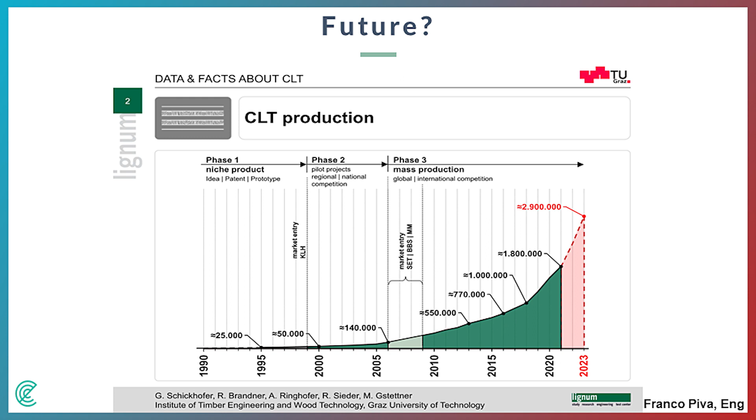Look what happened in 2010, 2015, and this year they expect that the maximum capacity, what we can call the press capacity of all the factories all over the world, will be almost 3 million cubic meters, which is huge. 20 years ago, it was approximately 70,000, 80,000 maybe. And now we're talking about 3 million. I asked the Graz University of Technology, who created this slide, if they have something to update, to see how they think 2024, 2025 will be.

Personally, I expect that for sure it will be more than 3 million. There is a lot of room still in the market. The demand is really high all over the world, not only in Europe, not only in North America. So I think this diagram will keep going up, and in the next few years it will be more than 3.5 million cubic meters. It is in metric, sorry, but imperial is very hard for me. 3 million in cubic feet, I have no idea. You can check, but it is really a lot of material.

CLT, in my idea, mass timber in general, is not just a material. It is not just timber. It is not just something we can use for our building. I really think that timber is a digital material. It is something we can quite easily use in our 3D model, in our digital model, and all these things together brought a big revolution in the market. So in the past 10, 15 years, we're getting more and more acronyms like BIM, DFMA, or aspects like robotic prefabrication, computational design, off-site versus on-site.

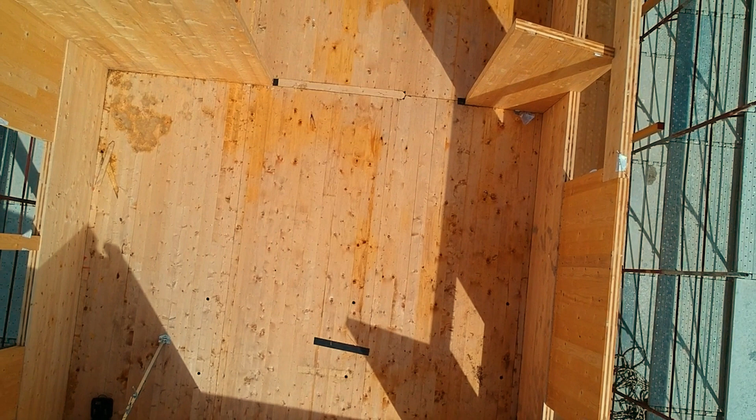And to show you what I mean for holistic and for detailing for DFMA, I made this short movie with my drone a few years ago. I was on the site, and I wanted to show that we need to raise our point of view. We cannot just look at our feet and say, okay, let's talk about the structure, let's talk about acoustic, that's it. No, we need to raise the point of view.

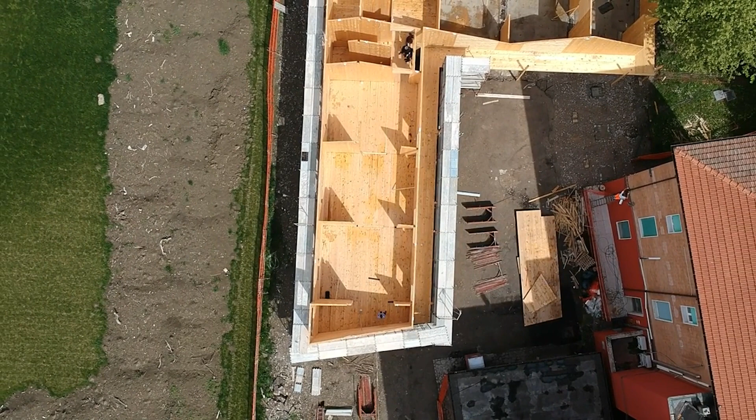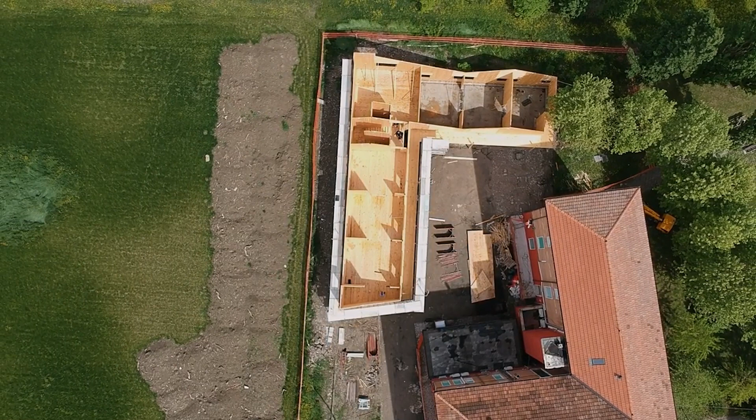We need to see how the site is. We need to know how big the crane is. We need to know if there are some limits for the trucks. When we work, for instance, on projects in Australia, we know that we always have to deal with the size of the container. They are 40 feet. They cannot be longer than that. Even if it is 40 feet plus 1 inch, the beam will be too big and cannot be transported on a container. So once you have the global view, the big picture of the project, then you can design the building and you can value engineer it using the tools we have like the DFMA.

And this is a very nice picture I took from this artist. This is what happens in many, many cases. We design something, we dream this building, then there is the first step, we meet the client, then we prepare the final drawings. Here we could be at level LOD 200, maybe LOD 300, but then on site you got this.

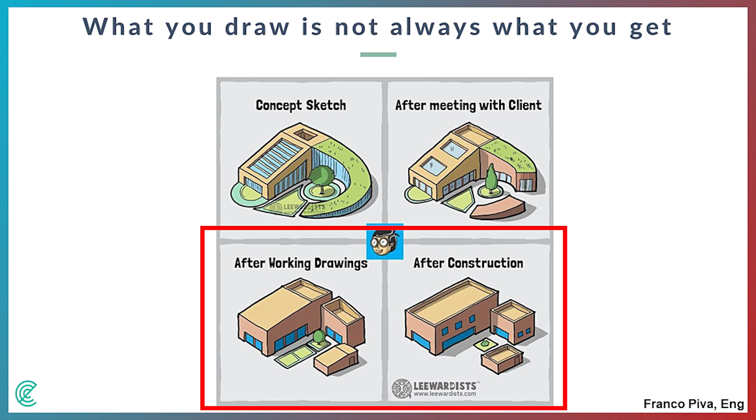I'm not saying that timber is solving all the problems, not at all. I was saying before, this year was so stressful for us with a couple of complicated projects that I told my colleagues, my business partner in Italy, I'm giving up. Stop, because there are so many problems. But this is very frustrating when we see it, because it means that there are so many problems between 1 and 4. So timber can help us.

How can timber help us? Because timber can be seen as a digital material. So once we prepare the drawings, we are sure that we draw something and we get exactly that element on site. No surprise, at least for the structure, everything will be exactly as it was on the screen. So those of you who were using the computer in the 90s know the acronym: what you see is what you get.

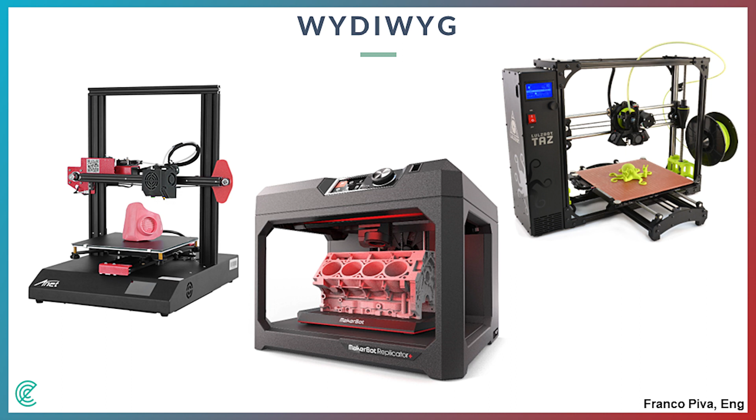It was meant to say, you see something on your screen, you print it, and you get it on your laser printer exactly as it is on your screen. Now we can make the same thing in 3D. You draw something, you get it on site. I'm sure you're very familiar with 3D printers. You can use Rhino, you can use the software you like.

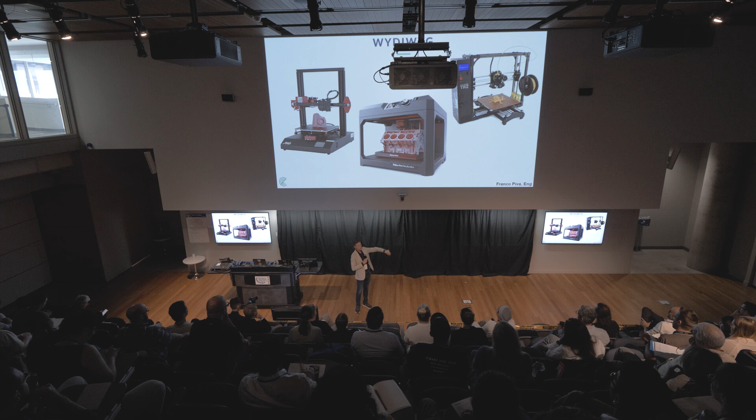It is something similar, in my opinion, to what happened in the Matrix movie. The people were seeing this, but behind this, there was a real world. There was a total real, semi-real world.

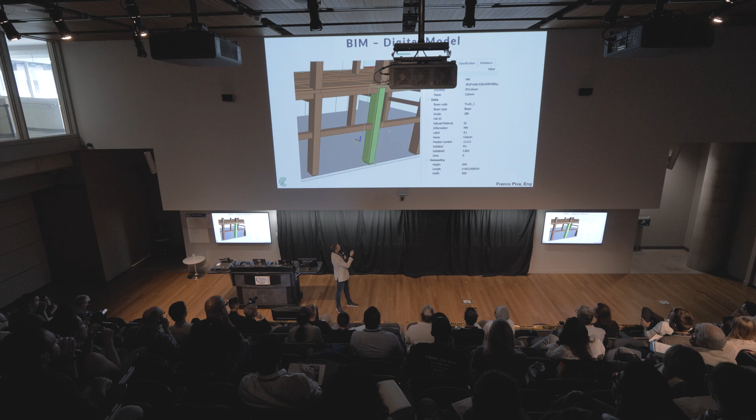And when I speak about the digital model, the IFC, the DFMA, etc., this is what I mean. The drawings prepared by the manufacturers, by us, or by the timber engineers in general, is an IFC model. And when you click on an element, the information you receive is not just "this is a timber element," stop. No, here you can read a lot more information. You can see that this beam will arrive on the first truck. The grade, GL28h, is the European grade.

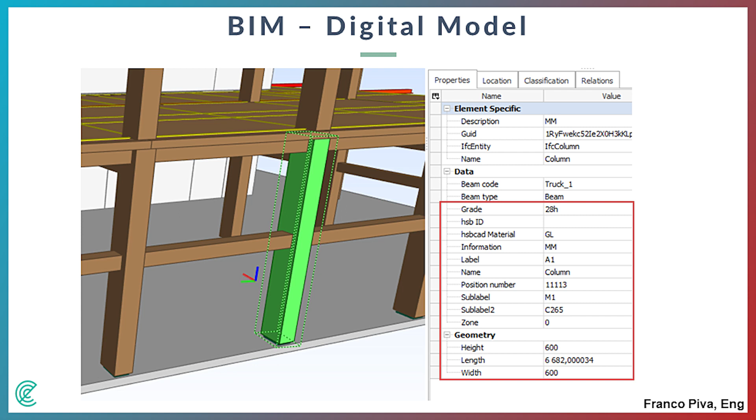Glulam, the name of the producer, and the number; there will be a label somewhere on the column telling you that this is label 11113. In our case, it means block 1, level 1, element number 113. So you click on the element and you see all the information. And that column, which is very complex, here is the head of it. The head of the column has this shape because we need to create enough room for all the connections. There is a mix of custom, bespoke and standard connections.

But the good thing is that on site, this is what we receive. These columns are quite big, 60 by 60 centimeters. We're talking about an 8-story building in Denmark. It is an office building, and you see the shape of the head of the columns compared to the drawing. Exactly the same size, no matter how complex the detail is.

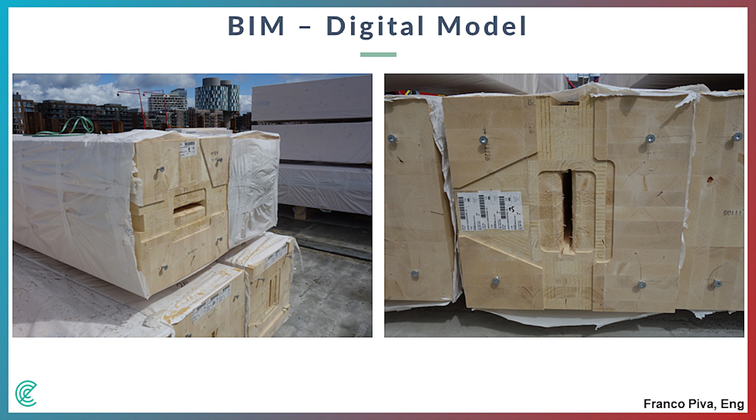The most complicated part is detailing, because behind this there is someone in the office spending hours and hours preparing the drawings, to be sure that the CNC machine will create that element as it was in the drawings. So sadly, in many cases, the time needed for the detailing is not considered, is not taken into account during the design process.

I look at the Gantt diagram. They arrive here, LOD 200, 300. Two months for production drawings. No way. Not doable. Oh, my image disappeared. Not doable. You cannot do it in such a short time. You need much more time for the detailing, for the connection design, optimization. Otherwise, it will not be a good result. So the production drawings are something similar to this.

You need to draw every single element. It's not enough to say slotted steel plate with 20 dowels. No, you have to draw every single dowel, one by one. You have to draw the steel plate. You have to consider the tolerance between steel and timber, timber to timber, timber to steel. All these things could be 0.5 millimeter, 1 millimeter, but you have to consider it, otherwise they will not assemble the element in the time they thought.

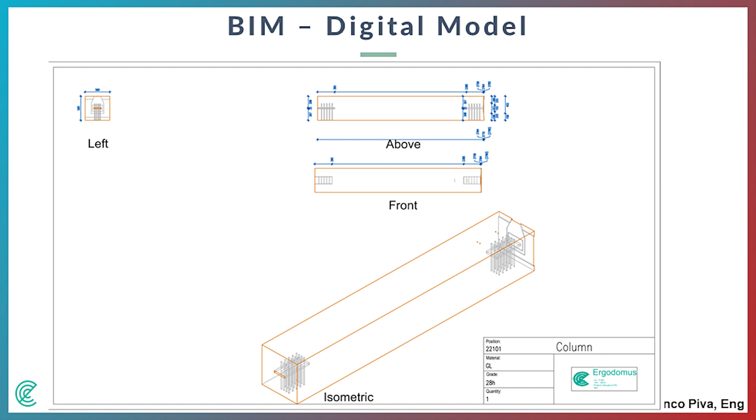I'm showing you now a few projects in the last minutes. I had the time of my presentation here, but it disappeared. I don't know exactly.

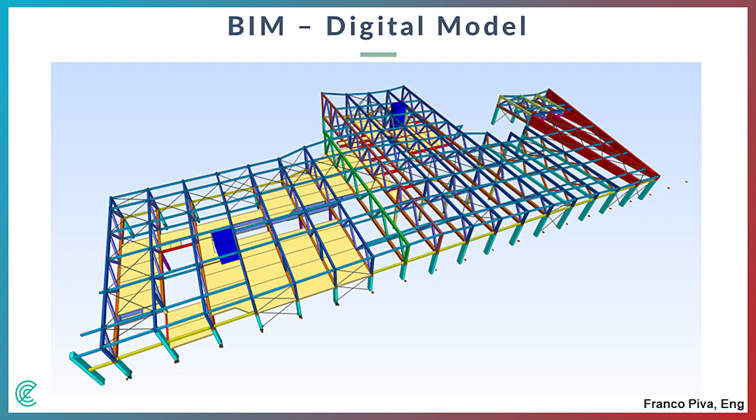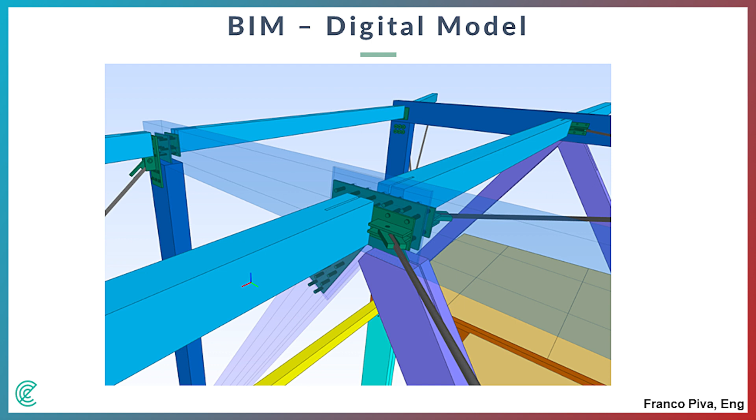Okay, this is another interesting project we completed recently in Australia. A lot of timber trusses with these CLT panels to create a first level for the offices. So this company has the trucks and the machines on the ground level, and the offices on the first level. They wanted to hide the connectors, the steel plates, as much as possible. So all the steel plates are completely hidden inside timber, but the bracings are visible. So we worked a lot together with the architects to try to make them nicer.

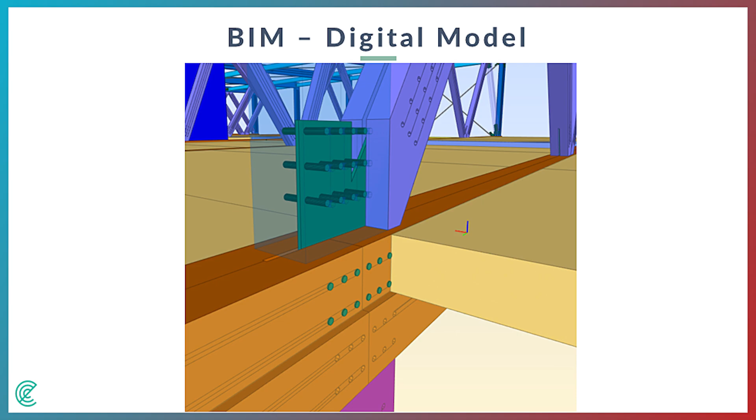But what they really appreciated was that we shared the IFC file, so they could see how the building will be. They received the first containers of material, I guess, late July, beginning of August, and they will start the assembly of the first elements. Maybe they started this week, or they will start next week. Again, you receive this 3D model, and we are 100% sure that you will get this thing on site. It will not be something a bit similar. It will be exactly what was on your computer, what was in the IFC model.

And you, as a developer, builder, architect, whoever you are, can just click on an element and see what that element is. You can see all the information of that element without sending emails, asking, calling: what is that? Is it CLT, 5-ply, 3-ply, 7-ply, etc.? You just open the IFC file and you click on it. You can import it into ArchiCAD, Revit, SketchUp, Rhino, whatever. But you can see all the database connected to the 3D model.

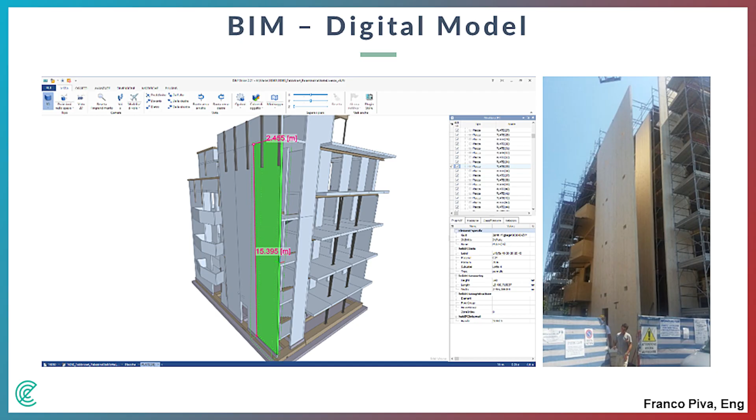And you can implement all the information you want. How many minutes they need to install the element? What's the cost per cubic meter, per square meter, per ton, per kilo, etc.? You can implement it in the description of the IFC element, and with that information you can quite easily work on those numbers using Excel or another spreadsheet.

A big difference: BIM versus BDM. Building information modeling is when we have all the information we need and we deliver the information they need. Building disinformation modeling is when this workflow doesn't work.

And sadly, it happens quite often. They send you an IFC and they ask you, I want something like this, but a bit different, can you please change the size of the beams or the inclination of the diagonal elements, etc. So

we as designers need to learn how to wisely use all the digital tools we have. There are many, many digital tools on the market, and thanks to this, we can say that BIM plus timber has many advantages. You can control 100% of the process.

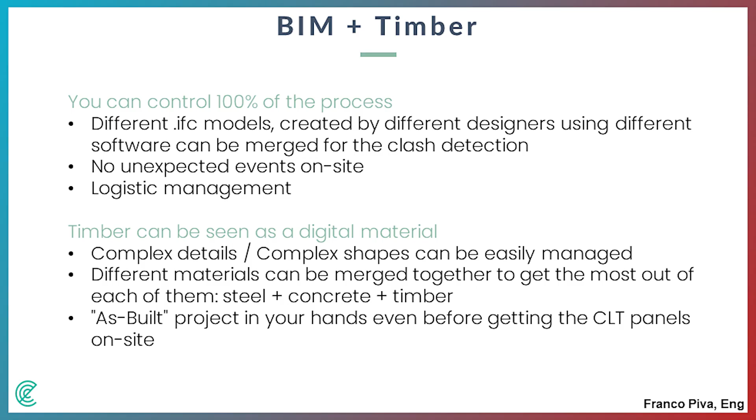Can you imagine you go with your iPad on site, you just click on an element, and you can compare if they install the element in the right position, at the right height, in the right location, using the right screws. Everything is implemented in the IFC file. So the control on site is quite easy because it is 100% digital. And again, the most complicated part is the drawing and not the production of the elements, the prefabrication of the element.

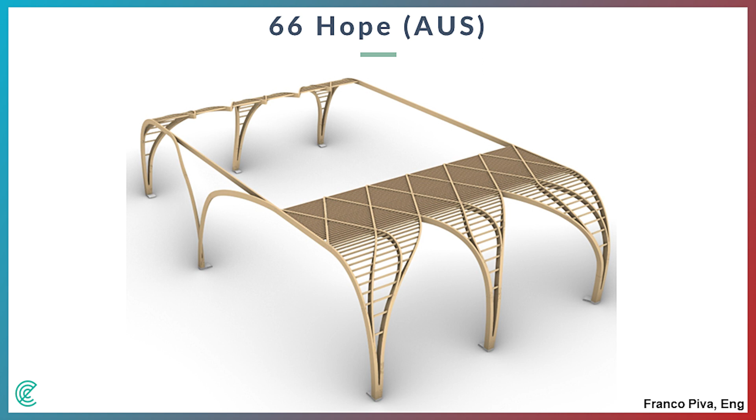I'll show you very quickly some pictures of some projects we completed in the past years. This is probably one of the most extreme ones. It is a canopy at the top of a skyscraper in Brisbane. They wanted to go for double curved timber elements, glulam elements. Not super sustainable, but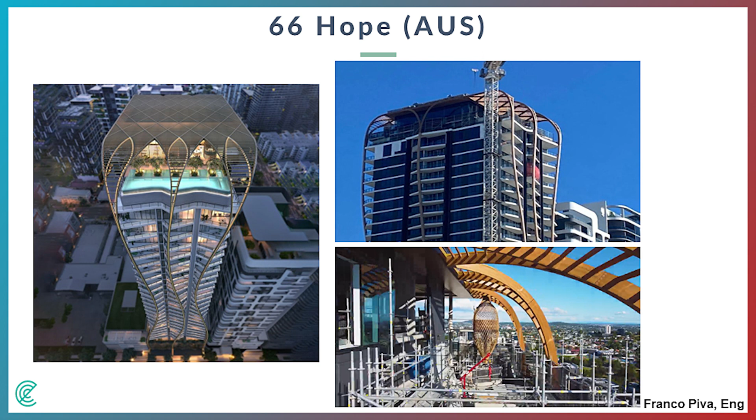So they completed everything, and they've never called. So it means no news, good news. They completed, they sent an email. Everything is fine. We had some troubles, but nothing special. So it was very good. I was very nervous when they started to assemble the structure because the tolerances were so small, but it looks amazing now from inside.

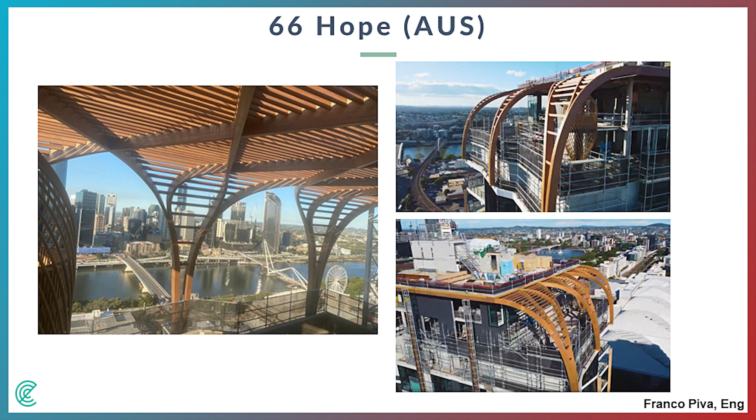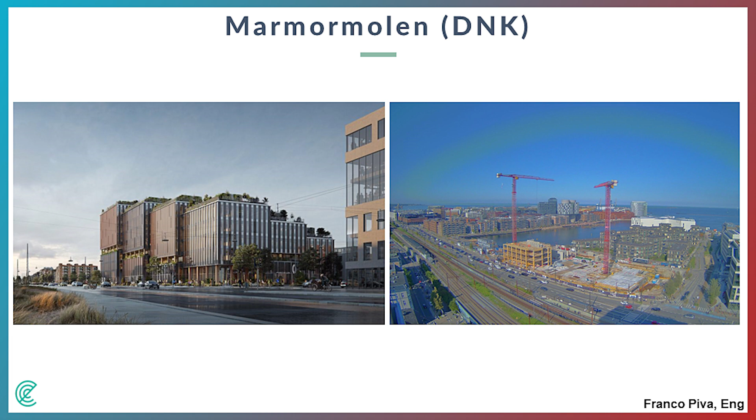This is the project I was talking about. It is in Denmark. This is a picture of this morning because there is a webcam, and you can see how they are assembling the building. So they completed just block 1 of 7, and it is level 1, 2, 3, 4, 5. This tower will be up to here, 8 levels, and then, as you can see, from 8, 7, 6, 5, 4, 3, etc. levels. It will be one of the largest in Europe.

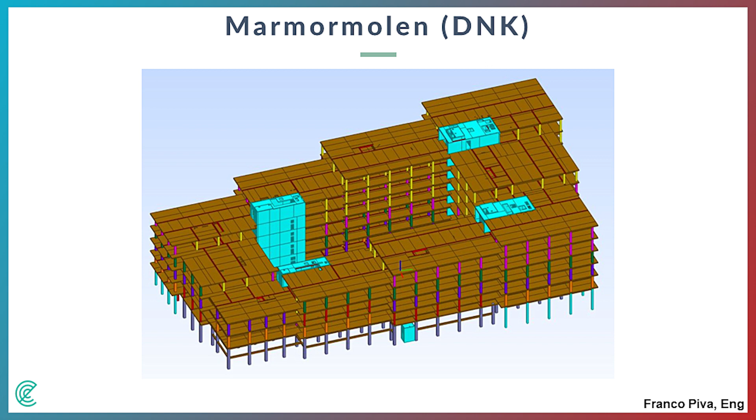We're talking about 300,000 square feet in total of CLT, and it is a hybrid structure. 4 concrete shafts, a lot of steel beams to have enough room for the mechanicals, and then timber and glulam for columns and beams.

We received these pictures just yesterday or so. We pre-drilled all the holes. Well, we drew, and then there was a company pre-drilling all the holes in the glulam beams, so it would be easier for plumbing, HVAC ducts, etc., to be installed on site.

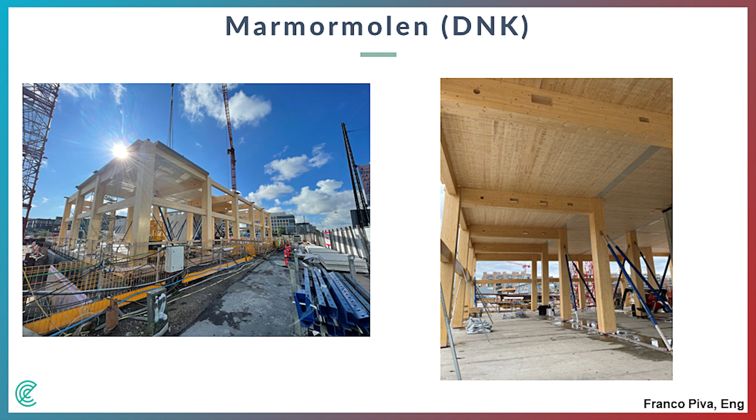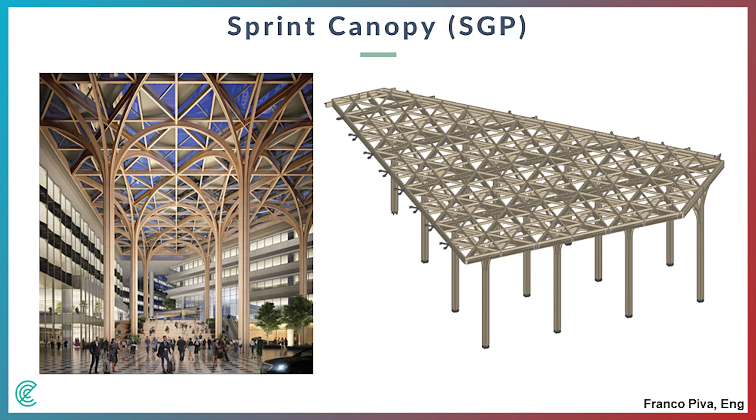Fun fact about this project: they rented an entire ship to transport these columns in one single element because they are 23, 25 meters long. So they were too long for the container, and we worked together to decide how to transport the elements. We helped them also in this project to manage a little bit the logistic aspects to transport material from Europe to Singapore. Here you can see some more pictures.

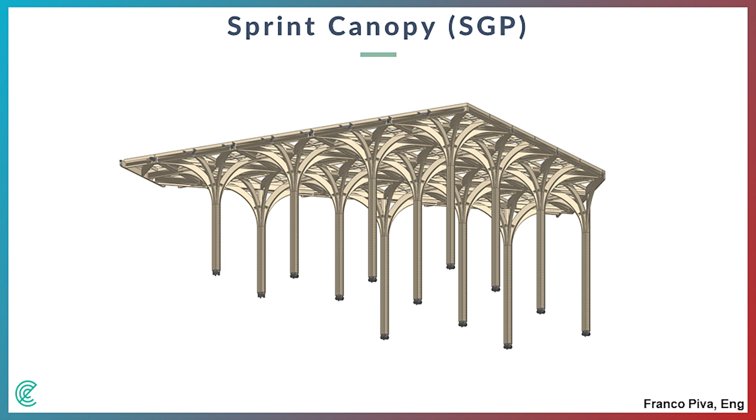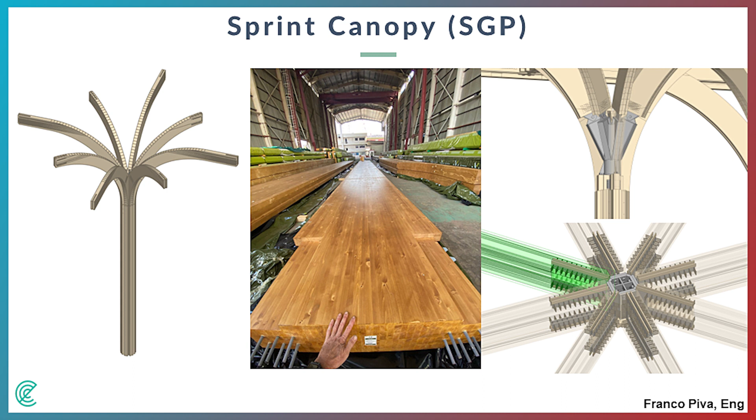This is the digital model we prepared and sent to the client for the final approval. They receive the IFC file. They say, yes, green light, and then we can send all the drawings to the production. But before, we always need to have the green light based on the IFC file. Well, these were the connections we developed using glued-in rods. There was a strict quality control to glue these elements off-site.

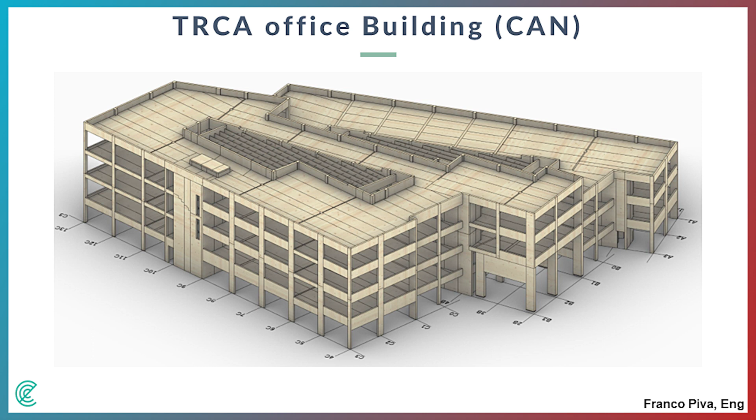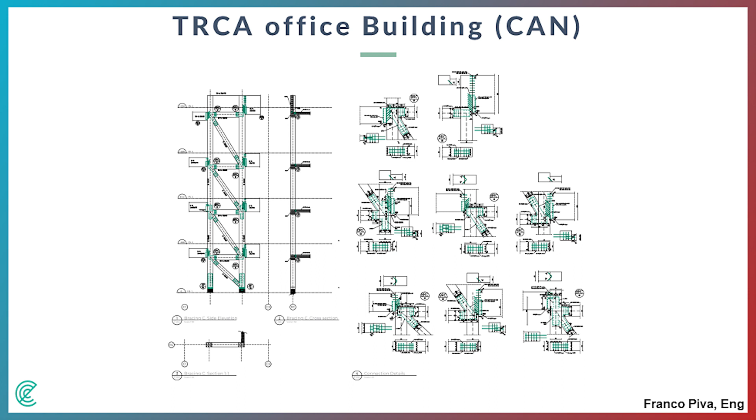This is a project here in Canada. We worked together with the guys of Element 5. It is the TRCA office building. Our scope of work was, again, connection design and detailing. And these are just two screenshots of some drawings we prepared.

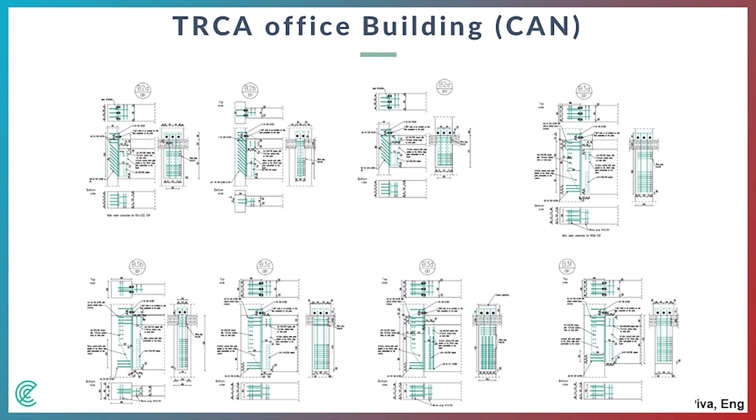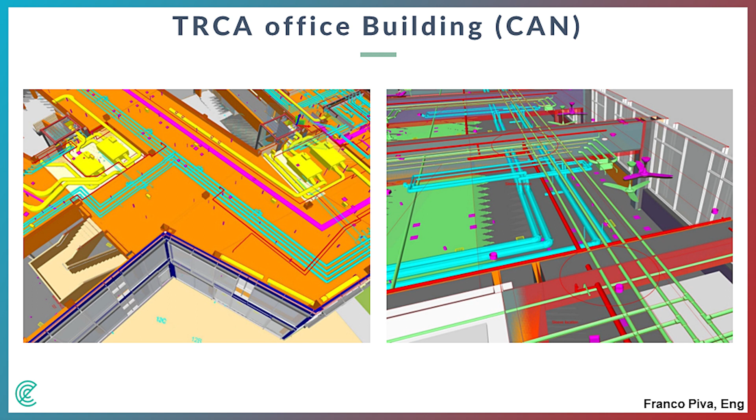These drawings show how complex the design of the connection is. We have tons of steel to design. Every single hole must be drawn. Every single aspect must be taken into account. And BIM here again was a powerful tool because there was a BIM manager merging together the timber model, concrete model, steel model, and the 3D model from the mechanicals to know exactly where to pre-drill the holes in the beams and in the columns.

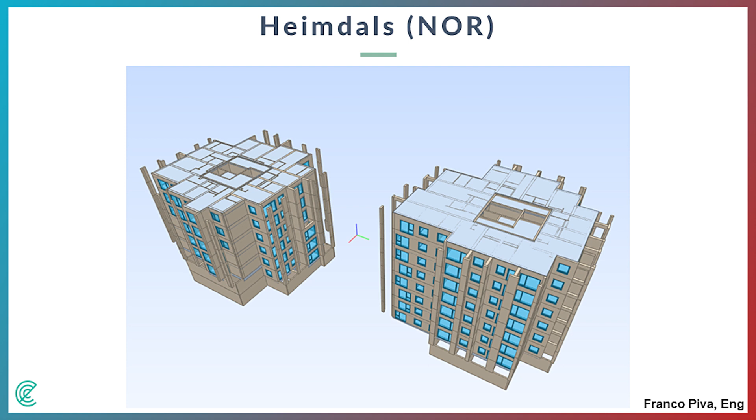The last project is this one, in Norway, and it is the very first modular building we designed. They completed it. There were super complex logistic aspects to manage, but they were not on us, because all the modules were produced in Poland, transported to Norway, to Trondheim in this case, and then with special transport from the port to the site, and then installed in a very short time with the crane.

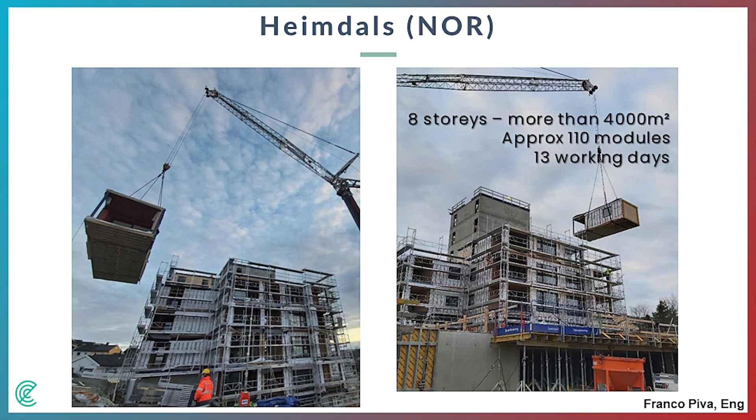These modules are not standard, sadly. Every module was a bit different. They are like 4 meters, 4.20 meters wide, 10 to 12 meters long, 3 to 3.5 meters high. They installed approximately 110 modules in just 13 working days, working on 2 shifts.

In all the modules, all the mechanicals were already pre-installed. So there were all the wires for electricity, pipes for hot and cold water, Ethernet cables, everything was already in there, and they had just to connect all these wires to the main cables, let's say, that were in the concrete shaft in the middle.

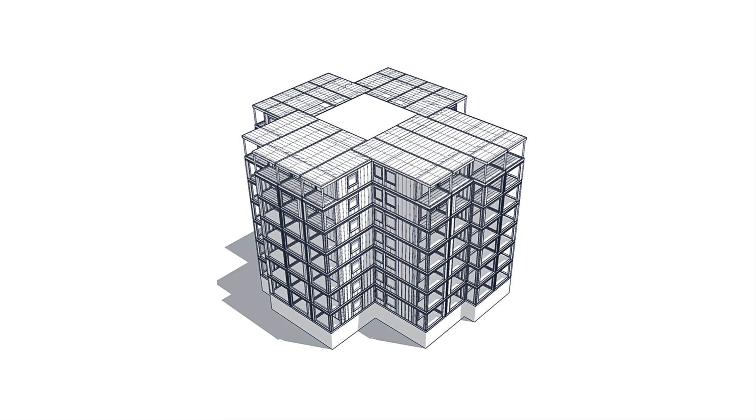That was the sequence they gave us. The sequence would be this one, because the connections we had to develop together with the company, completely new connections to connect the modules to the concrete shaft and the module to the next one, to the one on the left or on the right. It was a very complex project to work on. There were in total 2 towers, and they added an extra 4 towers for another very similar project next, quite close to this one.

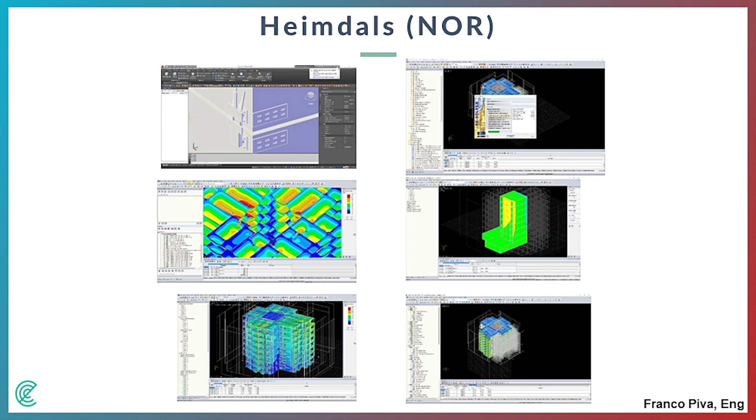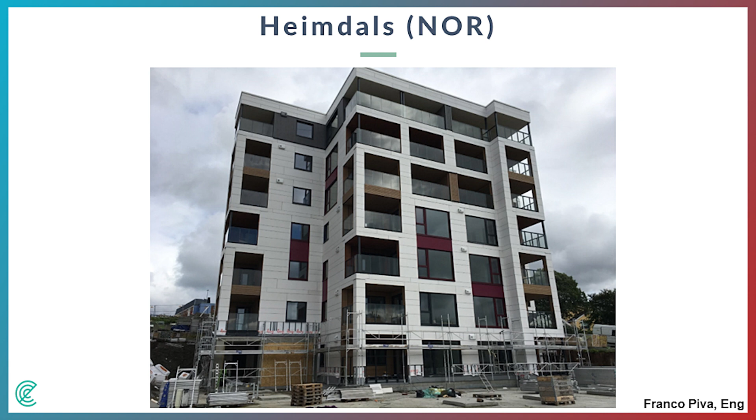And this is how the building looked from outside. You could never say that it is a modular building, but they install the facade after they complete the installation of the different modules. I think that here in Norway, the weather conditions can be quite extreme. Cold, rain. And in Trondheim, when they started the assembly, I think they had just like 4 or 5 hours of daylight. It's quite up north.

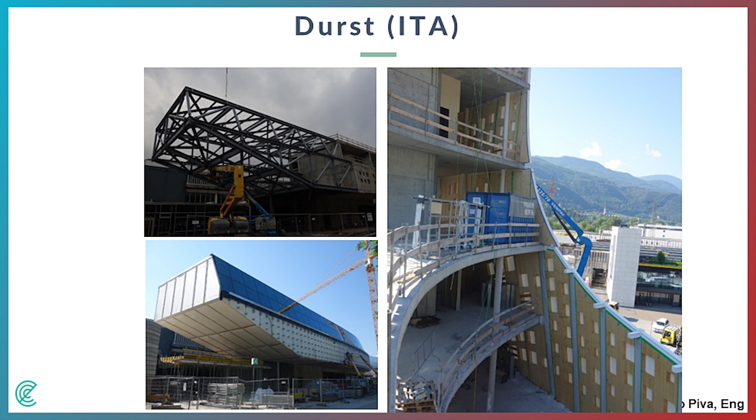Okay, and this is really the last one. It is a super hybrid project. It is the headquarters of this company, located in Italy. And they decided to go for CLT only for the facade because there were so many holes. Each hole has a different shape. We proved that CLT was the best solution to go for because it was light, first of all. And then it was quite easy to design all those holes and to create the files for the CNC machine.

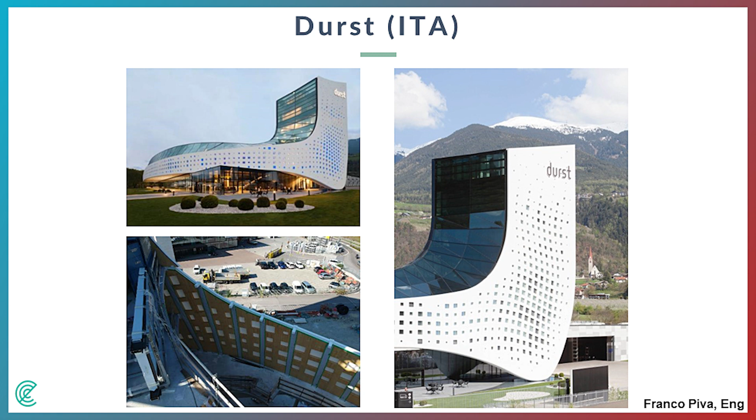They wanted to have the holes in a specific position because each window can be painted with a different color. So when a client from Canada visits the company, he will find the Canadian flag on the facade. They wanted to have this pixel effect because they produce special printers, and they wanted this pixel effect on the facade. So they paid a lot of attention to the position and the size of each of these windows.

It's okay. It's done. Thank you.

Thanks, Franco. So we have a few minutes for a Q&A, maybe about 5 minutes or so. If anyone has some questions they'd like to ask Franco. Someone up there, I believe, on the right.

Every time we have to change the workflow or better understand who is the owner of the BIM model. So for the project in Canada, we were not in charge of the production drawings, the 3D drawings, but Element 5 prepared all the 3D model, and we were supervising and telling them how the connections had to be made.